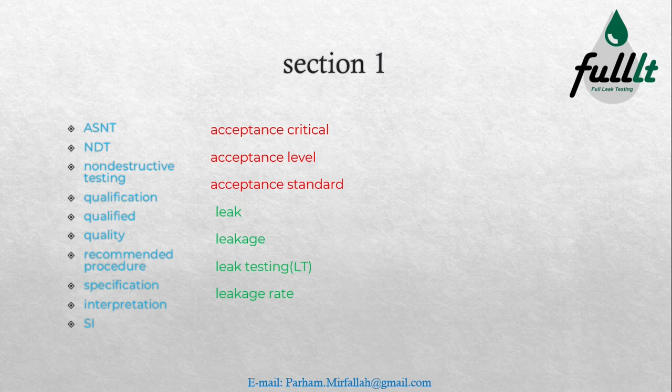In this section, we will get familiar with the basic words as you see in this slide. We'll learn them in detail and deeply. ASNT means American Society for Nondestructive Testing. This organization prepares references like the leak testing handbook and SNT-TC-1A and CP-189 standards. For more detail, you can purchase them on their site.

NDT, or non-destructive testing. For better understanding of NDT, we have to know DT first. DT means destructive testing, which includes tension, compression, shearing, torsion, and bending. In this kind of test, samples will be destroyed and lose their ability. But in NDT, the product will be safe, so it can be done for all products. Like magnetic test, which can find surface cracks as you see in the picture below.

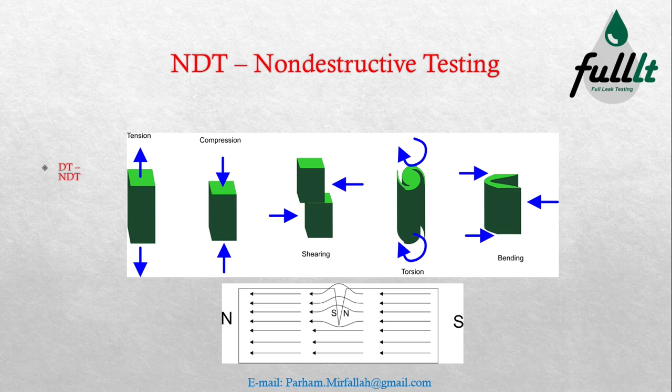Qualification means the process of demonstrating that an individual has the required amount and the required type of training, experience, knowledge, and capability. Qualified means having demonstrated the required amount and the required type of training, experience, knowledge, and capability. Quality means the ability of a process or product to meet a specification or to meet the expectation of its user in terms of efficiency, appearance, longevity, and ergonomics.

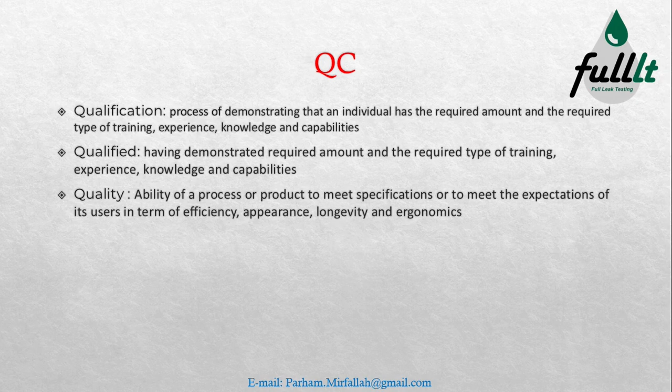Recommended procedure. Each employer needs a written practice which explains their personnel qualification. For this, we have to know two more words: specification and procedure. Level 1 and level 2 must be familiar with specification and procedure to know where they can refer to do their inspection. Level 3 must know them and know how to write them, because employers sometimes ask them to repair or qualify this specification or procedure, or even ask them to write a new specification or procedure.

The specification includes what and where to inspect, what product we want to inspect, or where to do this inspection, and how to inspect, usually with reference to a code or standard. Acceptance criteria: sometimes the acceptance criteria are in the code and standard. If they aren't there, we have to add this part. What and how to report results. This is very helpful for level 2, because level 2's job is to report the result. Who can inspect? Qualified personnel, qualification of personnel.

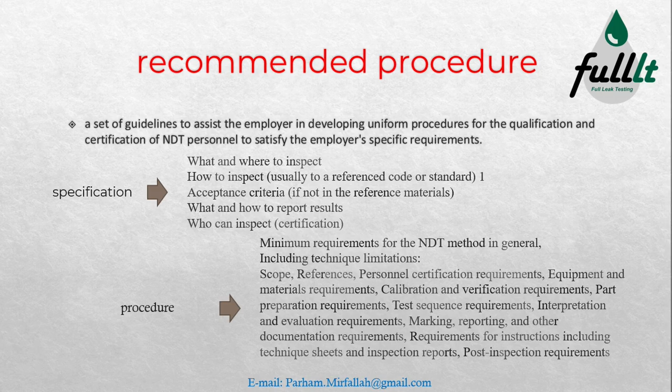Interpretation: determination of the significance of test indications from the standpoint of their relevance or irrelevance. The determination of the cause of an indication or the evaluation of the significance of discontinuities from the standpoint of whether they are detrimental or inconsequential. So interpretation directs us to make a decision about acceptance or rejection of the product.

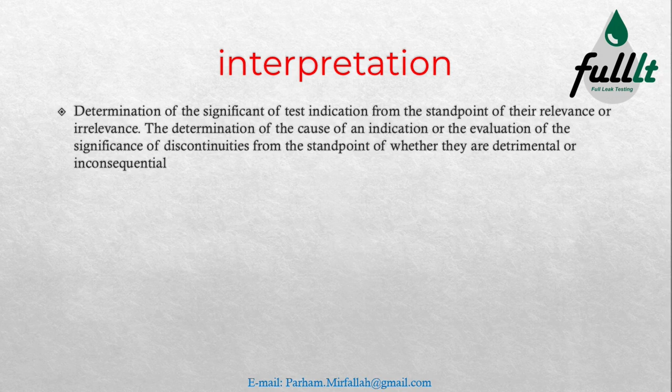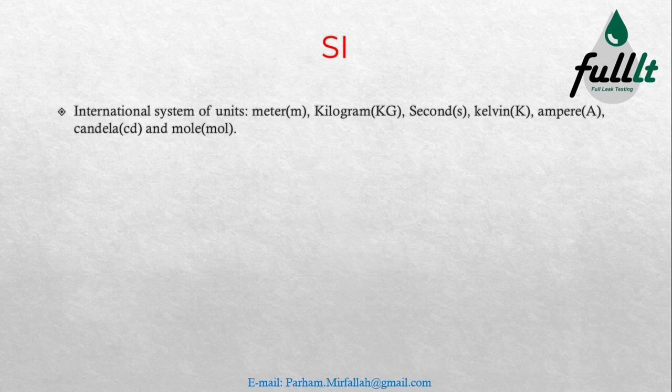SI is the International System of Units, as you know better than me: meter, kilogram, second, Kelvin, ampere, candela, and mole. Acceptance criteria: for each inspection, we need something like documents, tape, and even samples, which help us to compare our workpiece with them and figure out if it is acceptable or not. Acceptance level talks about the place of our evaluation about accepting or rejecting products.